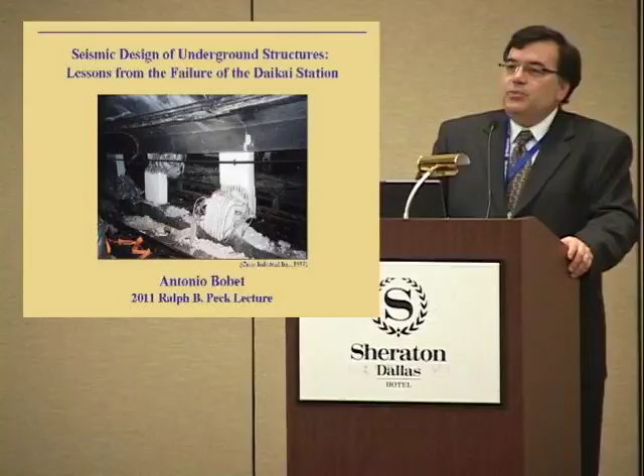The focus of this presentation is what we learned after the failure of the Daikai station. The Daikai station is relevant because this is really the first underground structure that collapsed during an earthquake and is well instrumented, and there was no liquefaction.

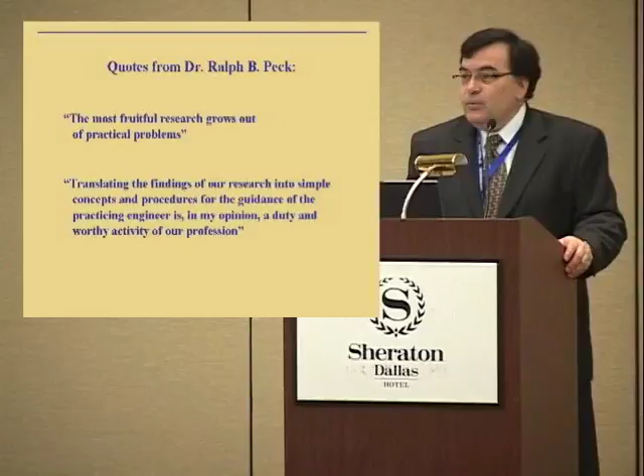But before starting, I would like to share with you a couple of quotes from Dr. Peck that I find relevant for this presentation. The first one says, 'The most fruitful research grows out of practical problems.' The second one is, 'Translating the findings of our research into simple concepts and procedures for the guidance of the practicing engineer is, in my opinion, a duty and worthy activity of our profession.' I hope these two quotes that inspired some of us to move forward with this research will be found relevant to this presentation.

The work could not have been done without the help of many people, and I want to acknowledge them right now. One is Dr. Huo, who is now at Earth Mechanics, a geotechnical engineer and very good colleague, Gabe Fernandez at the University of Illinois, and colleagues in structures, because we were looking at the failure of an underground structure. To work on that we need the expertise of different disciplines, and we worked together, geotech and structures, and I hope you'll agree that was a fruitful collaboration. I want to acknowledge the work of our colleagues in structures, Dr. Ramirez at Purdue, Dr. Sozen, also at Purdue, Dr. Parra Montesinos at the University of Michigan, and Dr. Maekawa at the University of Tokyo, and also the support of NSF and Purdue University.

This is the outline of the presentation. I'm going to start with the motivation of the work, a little bit of background, then spend a few minutes on our current design and highlight the problems I see in what we are doing right now. Then I'll get into the details of the work we did, the results we got, some conclusions, the lessons we think we learned, and then propose an approach for the design of underground structures, finishing with some conclusions.

What you see here is two pictures that hopefully bring across the setup of what is happening. This is the epicenter of the Kobe earthquake in 1995. Here are the epicenters of earthquakes that occurred between 1961 and 1994 with different intensities. This was an earthquake with an intensity of 6.9. The epicenter was about 13 kilometers deep, about 15 kilometers from the city of Kobe.

The source of these earthquakes - the Friday earthquake with an 8.9 magnitude, that was where pretty much the epicenter happened. This is a very large earthquake, a great loss to Japan, and I hope that today we should all have our thoughts with the Japanese, with our colleagues over there at this time of great trial.

The source for the earthquake, on the right-hand side picture, is the movement of the Pacific Sea Plate and the Philippine Sea Plate and the Pacific Plate that are moving against the Eurasian Plate and the North American Plate. You have these troughs and contacts, and this is a source of these large earthquakes.

The picture on the left-hand side, that's this yellow star.

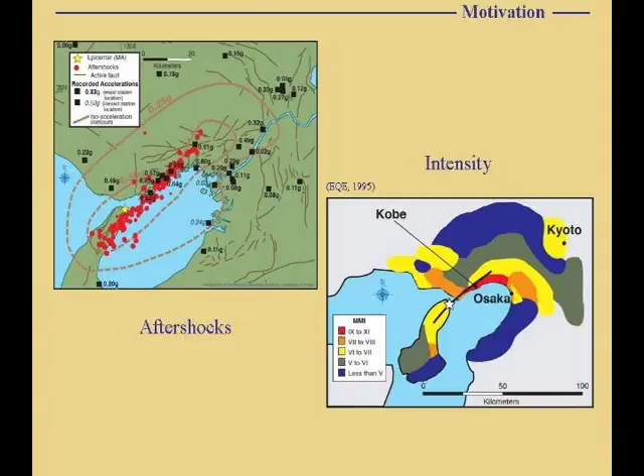The picture on the right-hand side is a contour of the intensity of the earthquake, and this red zone is of intensity between 9 and 11. As you move away from the epicenter, you expect the intensity would decrease, and indeed it does so. Away from the epicenter, you see these blue contours with intensities - this is the modified Mercalli intensity, less than 5.

As you move away, you expect a decrease of intensity, but also the soil conditions change. Close to the Osaka Bay, you have soft soils, and that provides a significant amplification of the earthquake. As you move away, there are two issues that play a role: one is the distance, and also the ground conditions change - you get into rock, and then the ground motions are a little bit lower.

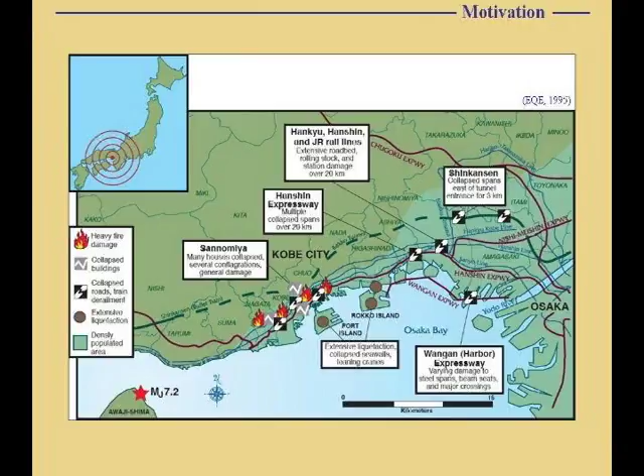Then you move towards the city of Kobe, which is about 15 kilometers from the epicenter. There was significant destruction - about 5,500 people died because of the earthquake, about 180,000 buildings collapsed, and significant fires after the earthquake caused a lot of damage because of the loss of lifelines. The Daikai station was very close to this node that says Sannomiya.

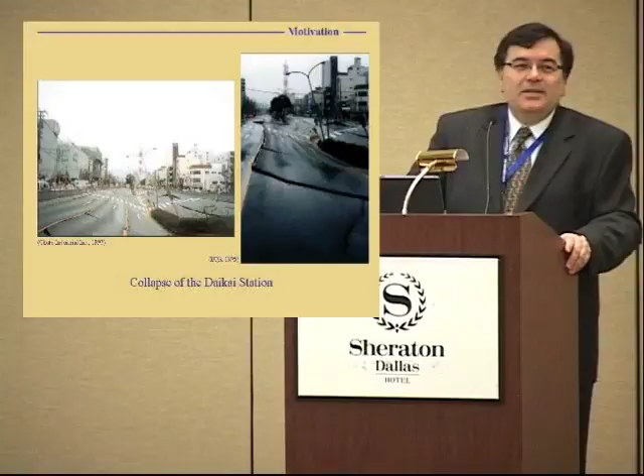That's where the focus of this talk is going to be. These are two photographs of road 28, on top of the Daikai station, showing the subsidence on top, caused by the collapse of the station - about 200 meters long by 20 meters wide, with about 2.5 meters of settlement of the road.

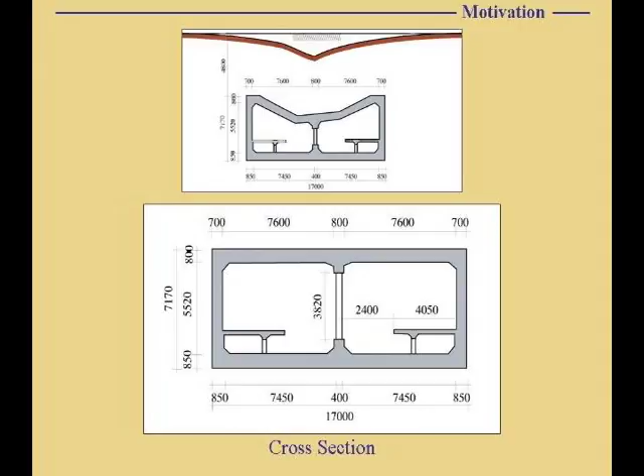It's about 4.8 meters below the surface. It was built between 1962 and 1964 by the cut and cover method, reinforced concrete, fairly thick walls about 85 centimeters thick, and the station is supported by central columns - we'll talk about those later - about 0.4 by 1 meter in dimensions, spaced about 3.5 meters apart.

The failure of the Daikai station was because the central columns collapsed in shear - a type of brittle failure. The collapse of the central columns induced the collapse of the top slab of the station, and that created the subsidence of the road on top of the station.

Now, the failure of the Daikai station, at the point when we started our work, was well known. The station failed because it was not designed for seismic loading, and the collapse was by shear failure of the central columns, which produced the collapse of the top slab.

The work that we did, and the point I'll try to make through this presentation, is that we were not necessarily interested in the collapse mechanism per se. What we wanted to find out and investigate is the load transfer mechanisms between the surrounding soil and the structure.

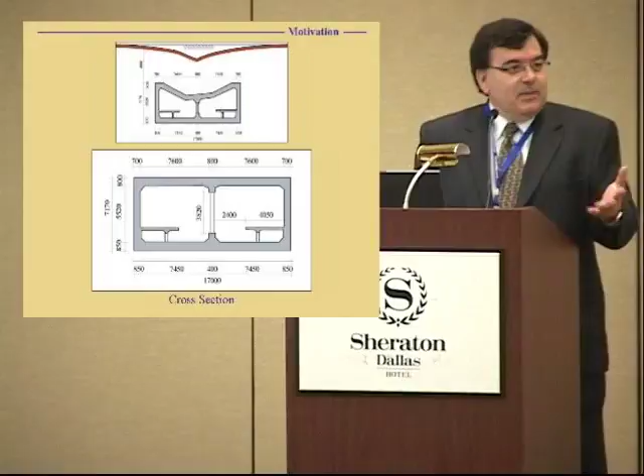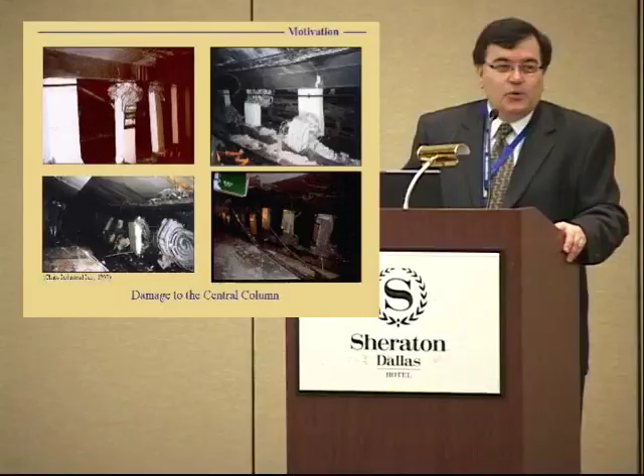If you focus on the top right picture, you see the column that failed, and you can see all the longitudinal reinforcement of these columns, and how this reinforcement buckled while the core concrete of the column is crushed. This is a typical mechanism of failure in shear, where there is not enough transverse reinforcement to absorb the shear forces induced by the earthquake.

So the structural mechanism of failure was clear. Work done by others, by Maekawa and others, showed nicely that the mechanism of failure was shear. But the point we were trying to look at is how the soil and structure work together, and how the displacements of the soil are transferred to the structure, and how the structure reacts.

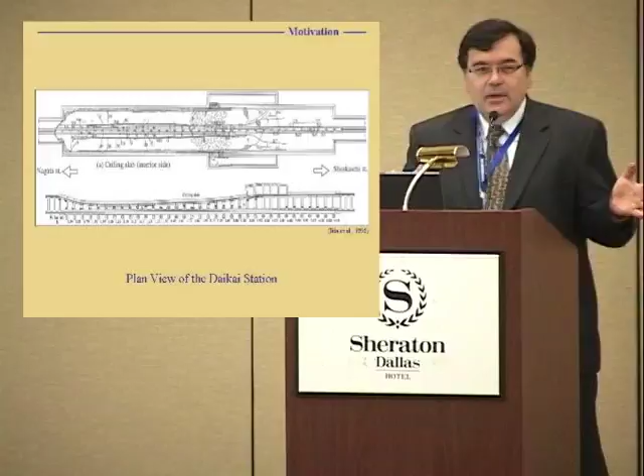This is a plan view of the failure of the station. The top is, as I mentioned, a plan view of about 30 columns that collapsed, about 100 meters long. The bottom is a vertical cross-section of the station with the columns collapsed. We'll talk later about the 3 areas of the station we want to look at: one is the areas that collapsed, and the others that did not. The question would be why this cross-section or structure collapsed and the others didn't.

This is a plan view, a sketch of the Kobe underground rapid transit system. This red circle shows where the Daikai station is located. Kobe has 2 underground transport systems, one public and one private. The Daikai station belongs to the private transport system, but other names that appear here, Sannomiya, Kamisawa, Nagata, Shin Nagata, are stations that also suffered damage.

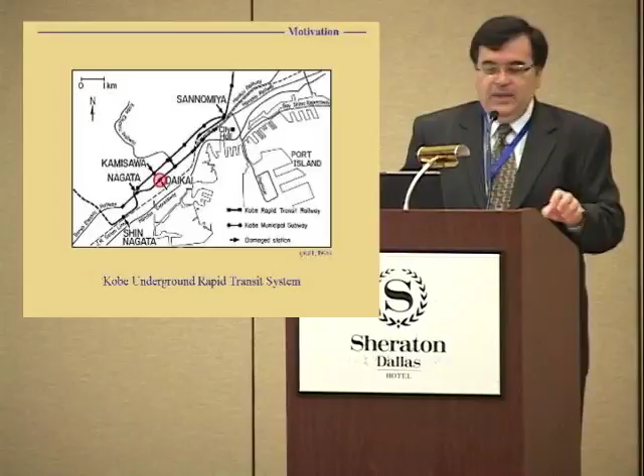As I move through the presentation, one point I'll try to make, and I'll insist about this later on, is that underground structures are sensitive to seismic loading, and that issue has been somewhat disregarded by us and by our colleagues in structures.

This is a sketch of the underground rapid transit system in Kobe. The Daikai station is in red, where the collapse occurred. On the left-hand side is the Kosoku Nagata station, where there was damage too, 5 columns, and the end of the station was damaged. The tunnel connecting Kosoku Nagata with Daikai station had 210 columns damaged.

As I mentioned, the Daikai station collapsed. If you move right to the Shinkaichi underground station, next to it there was an underground shopping mall with also damage to the structures.

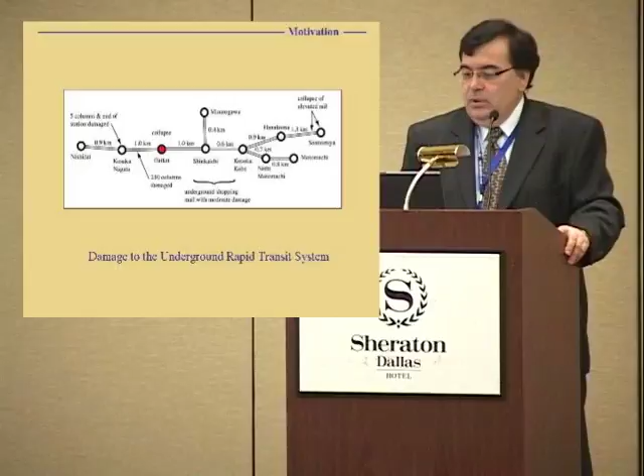So moving into current design, there are 3 sources of damage to underground structures: fault displacement, ground failure, and ground shaking. Fault displacement causes damage because the underground structure crosses an active fault. There is displacement of the active fault, and this displacement either has to be accommodated by the surrounding ground and support, or there is going to be damage to whatever is inside the underground structure.

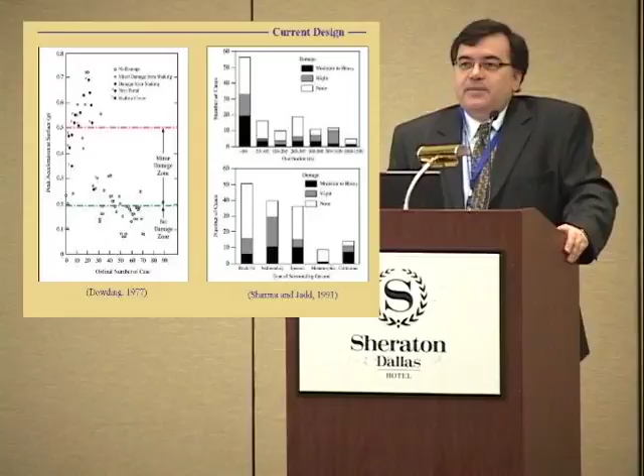Now, in the following slides, let's see if I can make the point that underground structures are indeed sensitive to seismic loading. What I'm showing here is 2 plots. One on the left is from Dowding in 1977, who compiled about 71 case histories of tunnels that suffered damage during an earthquake. On the horizontal axis, you have the case number.

On the vertical axis is the peak acceleration. This is the acceleration measured on the surface on top of the center of the tunnel. Of the 71 tunnels, about 20% had damage classified as significant damage.

These are the dots that are black. There were two other types of damage: one is minor or light damage, shown as gray dots, and no damage, shown as white dots.

The recommendation or conclusion is that if the peak ground acceleration on top of the tunnel is less than 0.2 Gs, the tunnel is not going to have damage. If the acceleration is larger than about 0.5 Gs, damage to the underground structures can be significant, and moderate to light damage occurs if the peak ground acceleration is between 0.2 and 0.5 Gs.

Sharma and Judd, in 1991, looked at about 190 tunnels and the level of damage. They classified the damage again into moderate to high, shown as the black columns, slight damage shown in gray, and none shown as white.

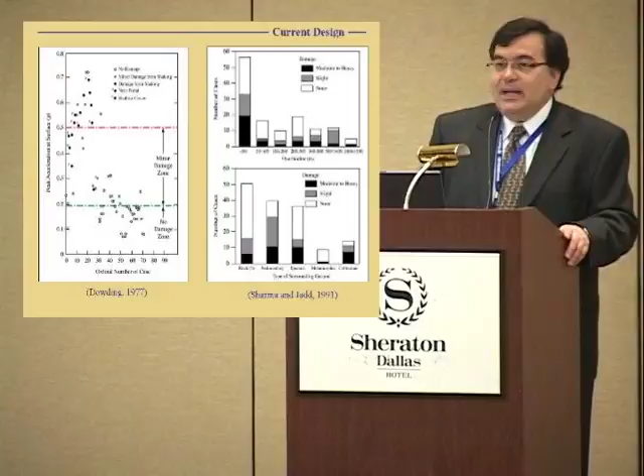So if you think in terms of stiffness, which we'll discuss more later, tunnels excavated in softer ground initially seem more sensitive to damage than tunnels excavated in stiffer materials.

One of the tunnels crossed an active fault. There was damage at the portals, mostly in terms of landslides and slope failure, and damage to the tunnel itself by shaking.

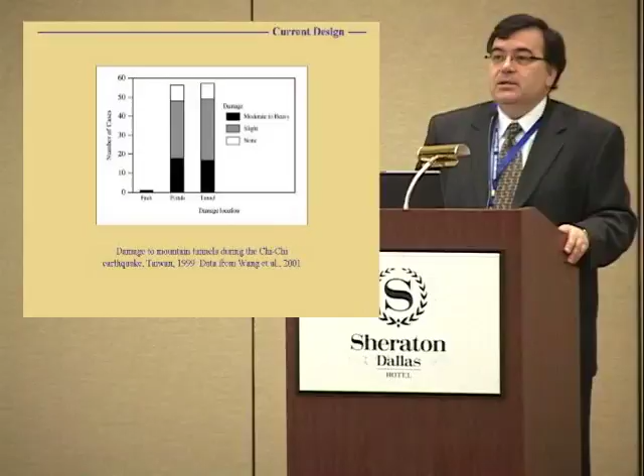Wang looked at 57 cases, and of these, 49 showed damage to the tunnels. This is significant evidence of damage to underground structures, which are sensitive to earthquakes. We have to look at their response during an earthquake, and they have to be designed to resist the deformations imposed by the earthquake.

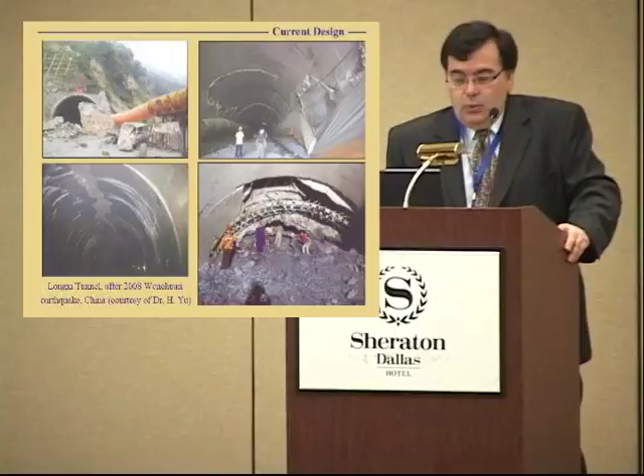This is damage that occurred at the Longxi tunnel after the Wenchuan earthquake in 2008. The top left picture shows failure at the portals, typically in the form of slope failure and landslides. The other pictures show damage inside the tunnel, failure of the liner in compression, shear, or bending, which can lead to collapse of the tunnel itself, as shown in the bottom right picture.

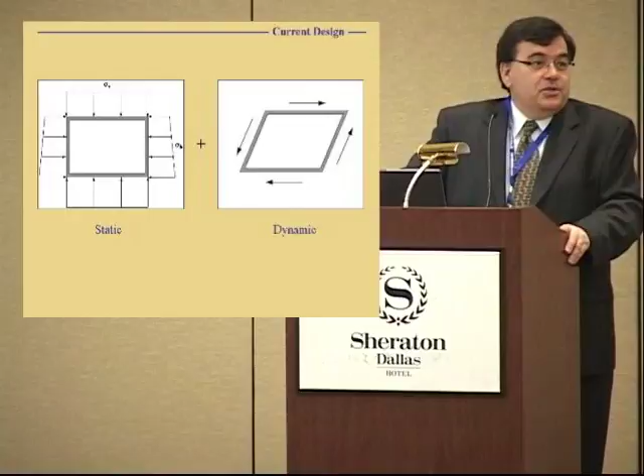Now, when we design for underground structures, there are two scenarios that need to be considered. One is, of course, the static loading, and the other one is the deformations imposed by the earthquake. This is what I call here the static and the dynamic loading.

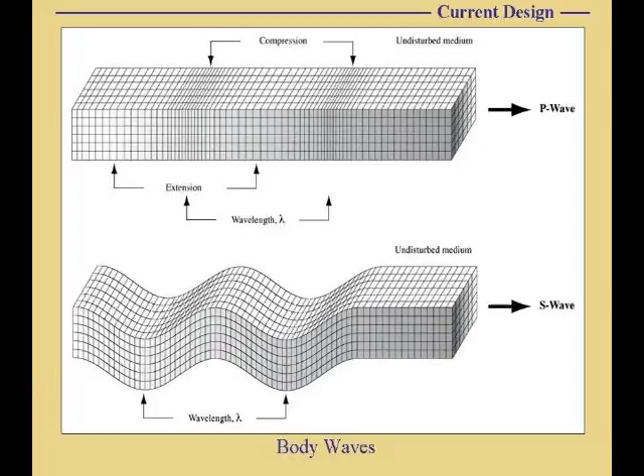Now, these waves are going to impinge the tunnel at a general direction, but what we can do is decompose these waves into P waves that are parallel to the axis of the tunnel, and P waves that are perpendicular to the axis of the tunnel, and shear waves that propagate parallel to the axis of the tunnel, and shear waves that propagate perpendicular to the axis of the tunnel. Each of these waves is going to induce different deformations on the tunnel itself.

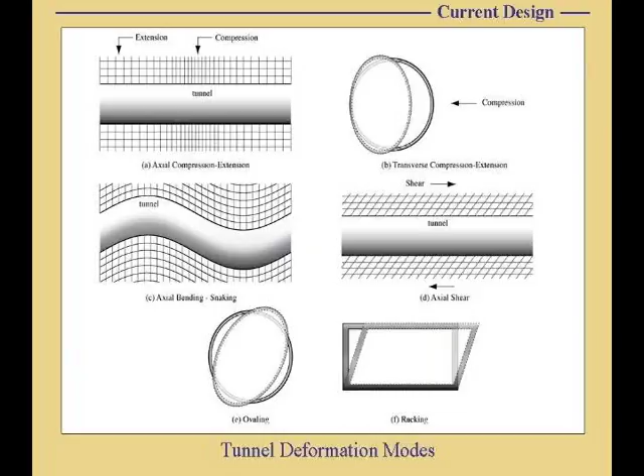Shear waves that are propagating parallel to the axis of the tunnel, that would be the center left, and propagating, let's say, on a vertical plane, would produce bending deformations of the tunnel. That's what we call snaking deformations of the tunnel. Shear waves that are propagating perpendicular to the axis of the tunnel, but the direction of motion is along the axis of the tunnel, that's depicted on the center picture on the right-hand side, and what you have is shear deformations on top and bottom of the tunnel.

The worst conditions by far are produced by shear waves that are propagating perpendicular to the axis of the tunnel, with motions also perpendicular to the axis of the tunnel. This is shown at the bottom of the figure. If you have a circular cross-section, that induces ovaling deformations of the tunnel, and if it's a rectangular cross-section, it produces what we call racking deformations of the tunnel.

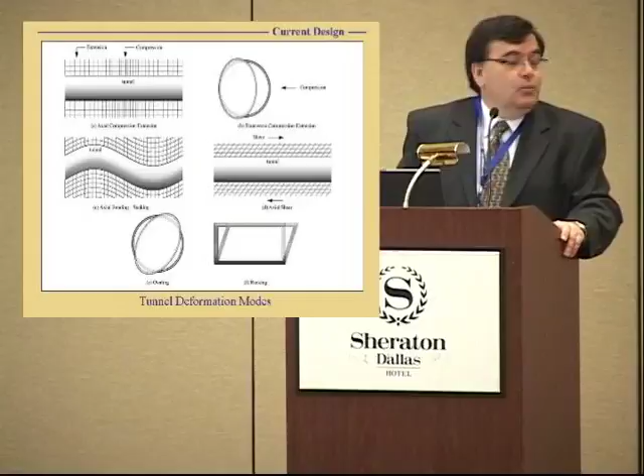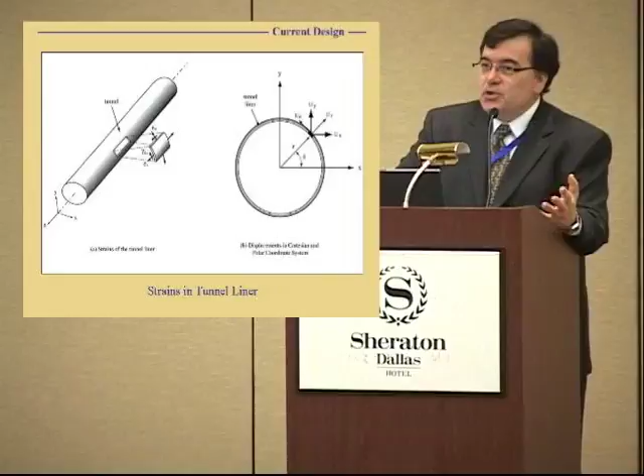Now, how are these deformations—the deformations induced by shear waves traveling perpendicular to the axis of the tunnel, with motions perpendicular to the axis of the tunnel—estimated? Most of the time, what is used is the free field method. The free field method assumes that the structure deforms the same as the free field. We compute the deformations of the free field, then we look at the location of the structure compared to these deformations, and look at the difference in deformations between the top and bottom of the structure. That's the distortion of the structure, and that's what we design the structure for. This is what is called the free field method—we design the structure as if the structure is not there.

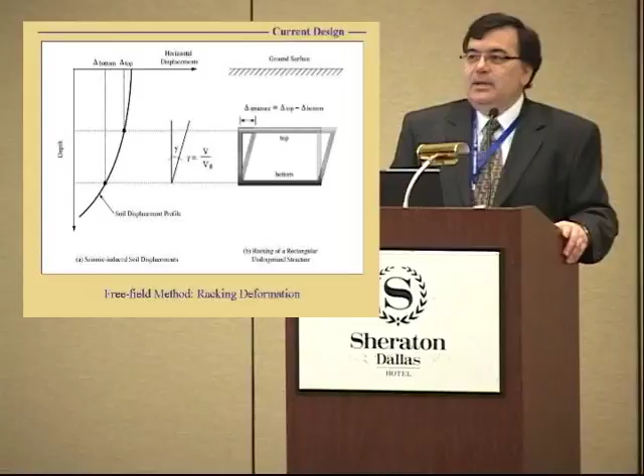Now, this equation is based on elasticity. And of course, the deformations of the soil are going to be much larger than those induced by elasticity. But if we try to estimate the deformations induced in the soil, they can be very large, and then we are in trouble trying to design a structure that is going to resist so much deformation. So it seems that the numbers that come up from this equation make sense, so we use it most of the time. Okay, so that's what we do. But now let's think about what we do.

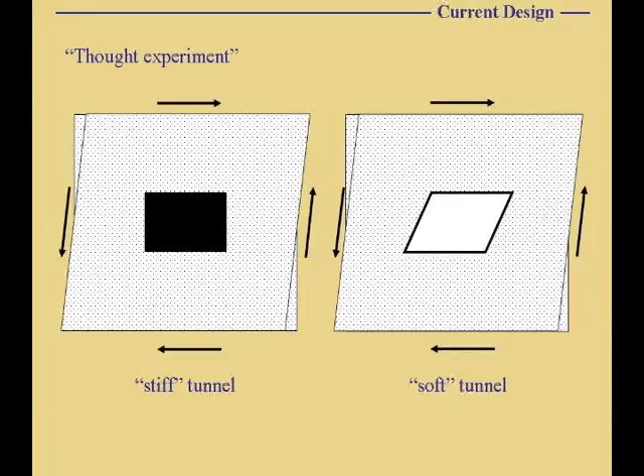Now I want to share with you a thought experiment. The beauty of thought experiments is that we can do whatever we want, and come up with any scenario that is physically impossible, and yet we can think about that. So let's think about a very stiff tunnel. We put this stiff rectangular structure in an infinite medium, and impose far-field deformations in the form of far-field shear stresses or far-field shear strains. Now, what we expect is that far from the structure, we recover free-field deformations. That's the principle of Saint-Venant, right? If we look far away from whatever point of application or disturbance we have, what we recover should be independent of what is happening at this particular location.

But what happens close to the structure? The structure is stiff, it's not going to deform. Of course, it's going to take some load because it's not going to deform. But also, the soil around the structure is not going to deform. So the structure is going to deform less than the free field. So if we use the free field method to design the structure, we may be extremely conservative.

Now let's go to the other extreme, and that's why it's a thought experiment. Let's suppose we introduce into this medium what we call a soft tunnel. Let's think of a hole - it's a thought experiment because we don't have to think about the support of this hole. Let's do the same thing: we apply a far field deformation. Far from this hole, we're going to recover free field deformations. But now, because we have a hole, we have weakened this medium. Now the deformations around this structure are going to be larger than the free field. So the design using the free field method in this case is non-conservative. So if we use the free field method for stiff structures, we are conservative, but we don't know by how much. If our structure is softer than the surrounding ground, then we are unconservative.

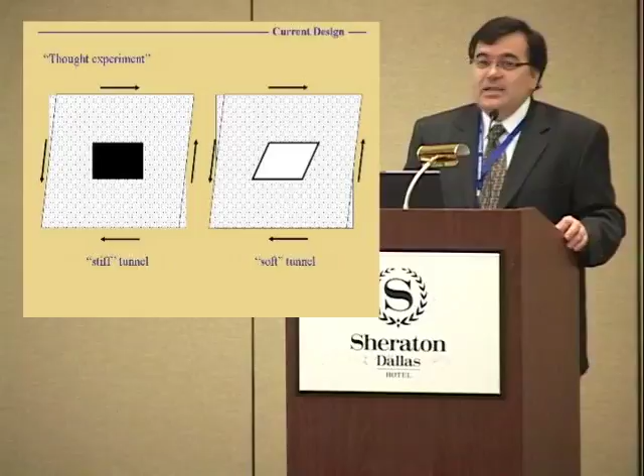So there are two things you can take from this lecture: one is that we need to design underground structures for seismic design because they get damaged and they fail. And the second thing is that I think the free field method should be abandoned because it provides very poor information about the actual response of the structure.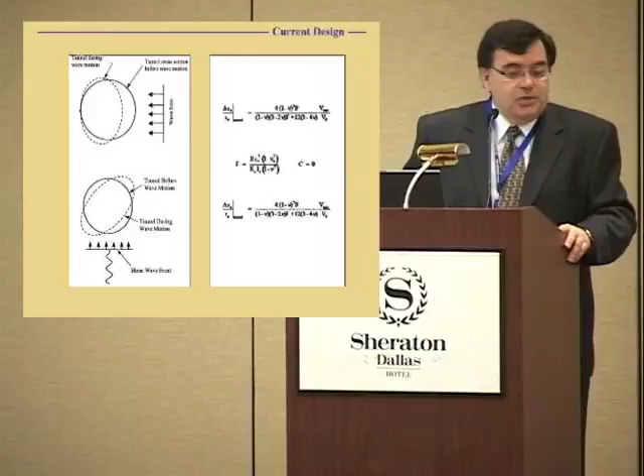So if we take this factor and make it 0, you have a stiff structure, and indeed you have 0 deformations. But if you make this factor infinite - this is a thought experiment, so we can do that - then you have a very flexible structure, and these ratios of deformation are going to be much larger than the ratio of peak particle velocity divided by P, or shear wave velocity. I hope that this slide closes this argument.

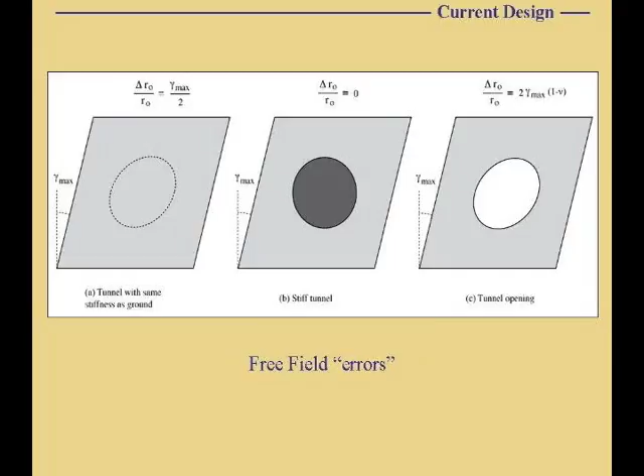On the right hand side, what you have is the deformations of a hole in an elastic medium. But if you look at the elastic solution at the top, that delta R over R is a measure of the distortion of the structure. That can be about 3 to 4 times larger than the distortion induced in the structure if the flexibility is the same as the surrounding ground.

So again, still we use the free field method. The free field method actually was used for the redesign of the Daikai station. But the point I'm trying to make here is that that should be abandoned.

Now, let me get a little bit into the details of the work that we did and what we learned. Of course, part of what I told you already is what we learned, so it's not a continuous process. But let me share with you some of the results that we get. So I'm going to get into the numerical analysis.

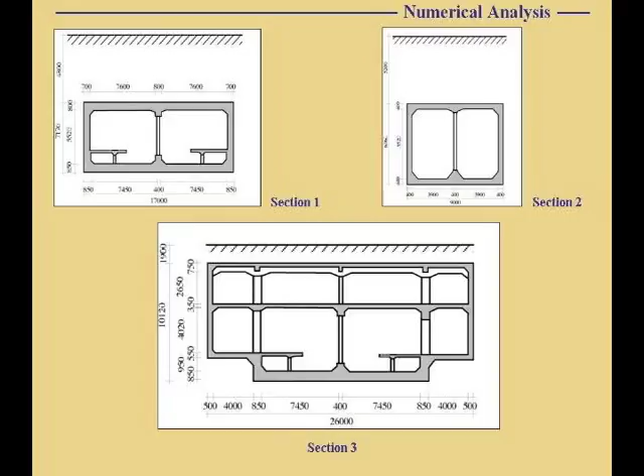All these are different structures. All of them show different behavior. If we had used the free field method, all of them should have deformed the same, and yet the behavior is different. And the question, of course, is why.

So these are the 3 sections. Section 1 is the one that collapsed. It's about 17 meters wide, 7 meters tall, about 4.8 meters below the surface. Section 2 is the tunnel, about 9 meters wide, 6 meters tall, same overburden.

Section 1 has columns with a cross-section of 0.4 by 1 meter, spaced at 3.5 meters. Section 2's columns are a little bit smaller, 0.4 by 0.6 meters, spaced 2.5 meters. And section 3 is very large - this is the access station. It has about 26 meters wide and about 10 meters tall and reaches the surface.

These are pictures of the station as it is today. And what you see is the central columns, painted white and red. Everything is new except the bottom slab. The bottom slab is the original slab. The rest is rebuilt. So they excavated the station, rebuilt the station, and refilled the material around the station.

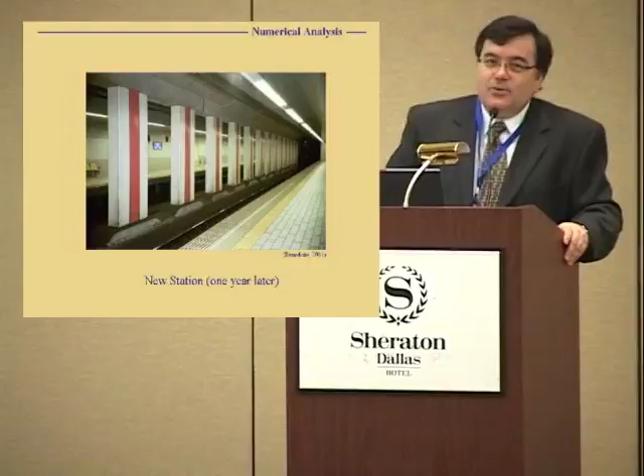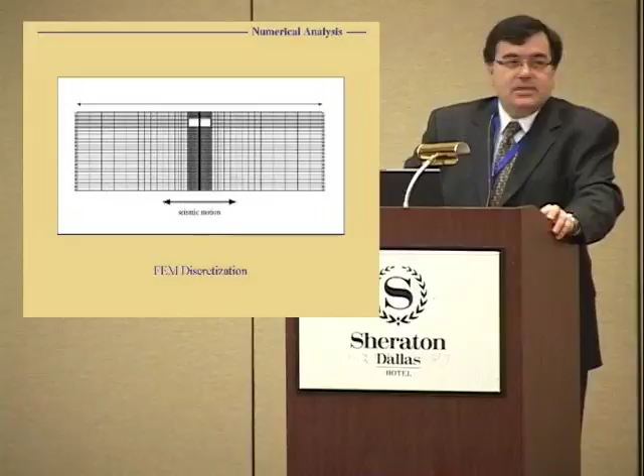So what we did is numerical analysis. We discretized the medium, put the station in each of the sections: section 1, section 2, section 3. We input the seismic motions at the bottom of the discretization, and used the actual soil properties at the site to do the simulations. Again, the point is to understand how the structure and the soil work together, not necessarily to reproduce the failure of the station.

This picture shows the two soil investigations that were done for the station. The one on the left was done in 1959 for the design of the underground station. The one on the right was done after the failure of the station in 1995. This is an expanded view of the stratigraphy reported from this investigation.

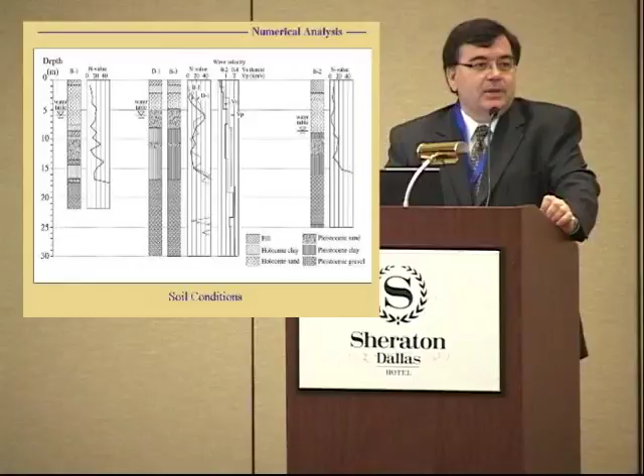There are, in essence, three types of soil. There is a fill on top, about 1 to 2 meters thick. Then there are soft deposits of Holocene origin, mostly fine sands and clays, with low SPT blow counts, maybe between 8 and up to 10 or a little more. As you go deeper, the origin of the deposits changes—they are of Pleistocene origin, also sands and clays, but much stiffer, with blow counts below a depth of about 20-something meters that go beyond 40 and 50.

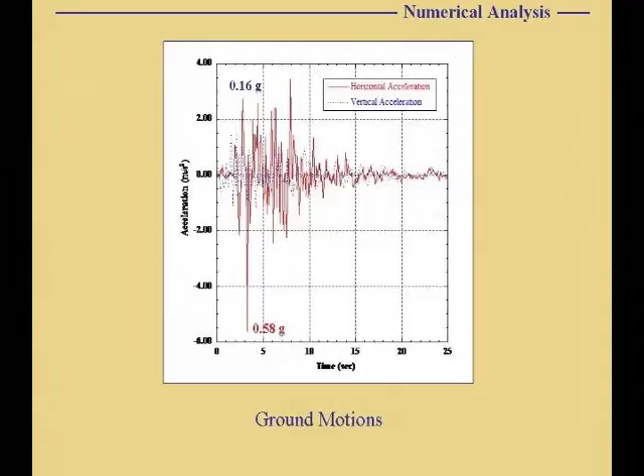One point I want to make right away is that in this particular case, the vertical acceleration's influence on distortion of the structure was very small. What the vertical acceleration did was increase the axial loads on the structural elements by about 16%, roughly 0.16 G.

We understood that one of the key factors we needed to take into consideration to simulate the behavior of the structure was the relative stiffness between the structure and the surrounding ground. So we decided to use a soil model that was, on the one hand, simple enough so we could do all these simulations in a few days, and also robust enough that we could get a solution.

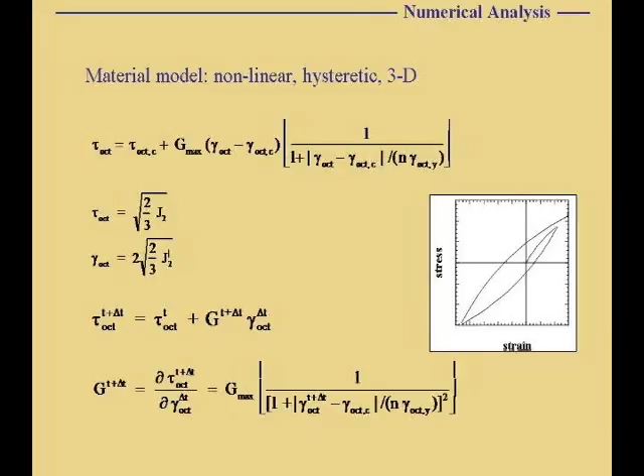But it also should represent the behavior of the soil—a model that reflects the loss of stiffness of the soil with deformation, and also reflects the increase in damping of the soil with deformation. We checked this model by comparing its predictions with laboratory results.

We would change the stiffness of the central wall such that the response, the behavior of the structure in 2D, was equal to the response of the structure in 3D.

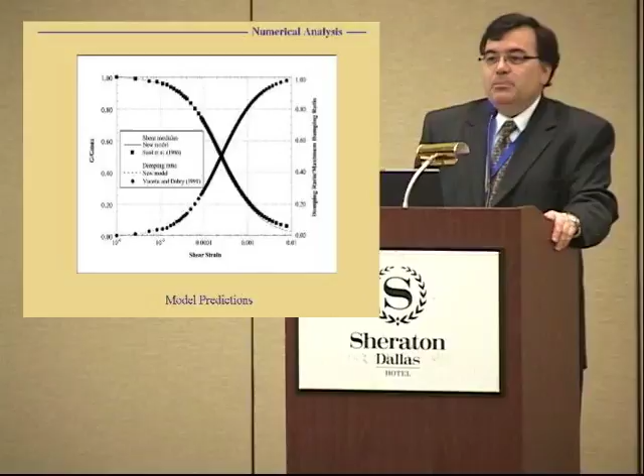We'll go through the details and see if that was indeed enough for the collapse of the structure. Anything after 4 centimeters is basically theoretical because the structure was not there anymore. But we felt we should go further and get the complete solution, because we might learn something from it. And we did.

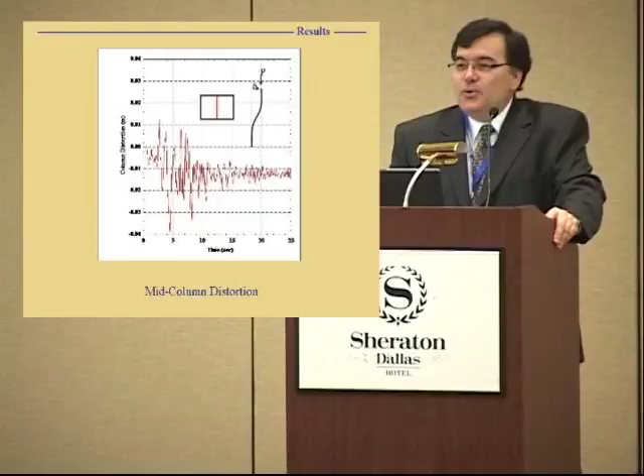If you look at this plot, of course there's significant damping because of the soil model we're using, but one interesting thing is that at the end of the earthquake, about 20-25 seconds, there are permanent displacements. The displacements don't go back to zero. This is because the loading and unloading portions of our soil model are not the same, and because of that you expect to have some permanent distortions on the structure.

Numerical methods have the advantage that you can get all solutions possible anywhere you want. The key, as mentioned earlier, is how to interpret these results, and I hope we try to do some interpretation and share it with you.

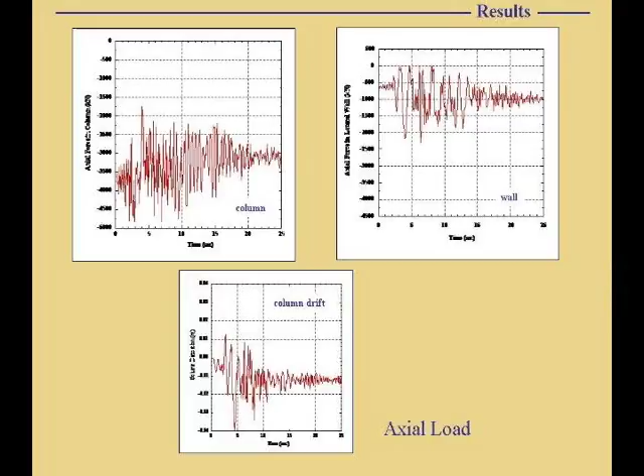If you look at the plot on the left, you start from static conditions, then you have the oscillations produced by the earthquake. But the end result is that there is some unloading on the central column. Of course, if some part unloads, there is no free lunch - somebody else has to take this load. If you look at the plot on the right, indeed the lateral walls are the ones that take the load. That's not uncommon in underground structures, because the center of the structure is a little more flexible than the edges. So the center tries to unload, there is some arching effect, and it transfers a little bit of load from the center part of the structure to the stiffer lateral walls.

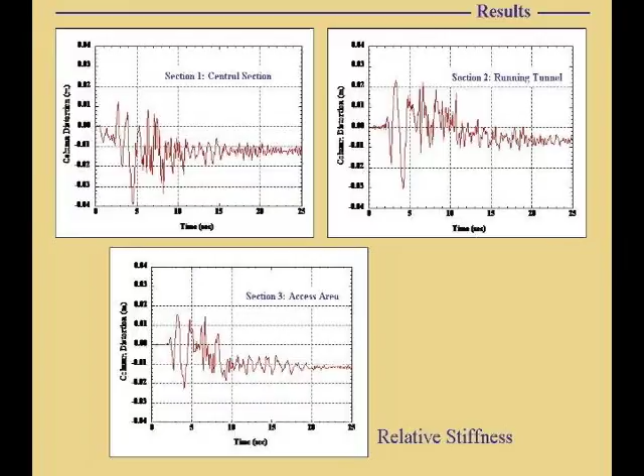Looking at these two, the deformations of section 1 are larger than those of section 2. The deformations of section 1 are about 4 centimeters, that's what the model predicts, while the deformations of section 2 are 3 centimeters. The soil around the structure is the same, so the reason for that is that section 1 is a little bit more flexible than section 2.

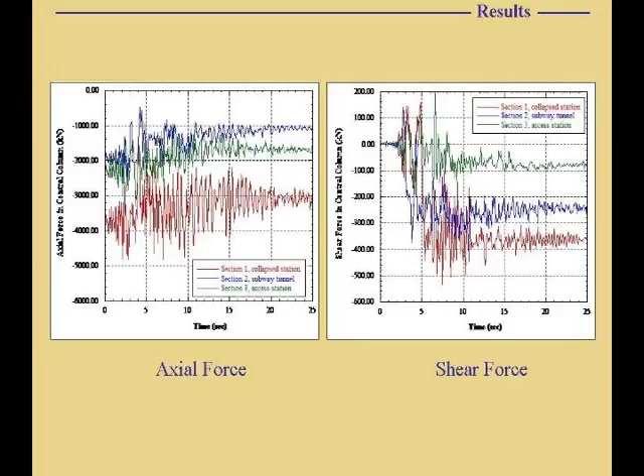And because of that, it's going to deform more than section 2. If you look at the distribution of axial forces and shear forces, which we need for the structural analysis, in red you have section 1, and in blue you have section 2, the tunnel. Section 1 has larger axial forces because the span of the station is larger, and also has larger shear forces because the span is larger and deforms more than section 2.

I'm going to get a little bit into the details of structural analysis, and I think this is important because as geotechs, we need to understand what our colleagues in the structures do, and perhaps more importantly, we need to convince our colleagues in the structures that they need to understand what we in geotech do.

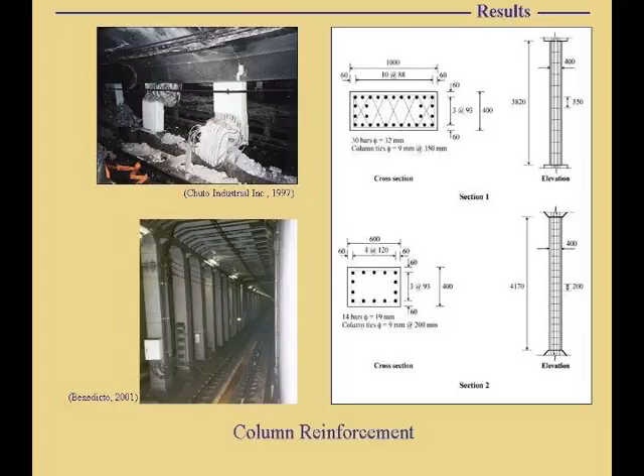The top is section 1. It was heavily reinforced in the axial direction, with about 6% of the area being steel. The transverse reinforcement was done by hoops and zigzag stirrups connecting these columns. But if you look at the spacing on the far right of this picture, it was 350 millimeters. Our current code requires spacing of transverse reinforcement of about 100 millimeters. So clearly the spacing was too large.

These stirrups and this transverse reinforcement could not prevent the buckling of the longitudinal reinforcement. If you look at the actual picture, you see this longitudinal reinforcement buckling. It's because there is a lack of transverse reinforcement.

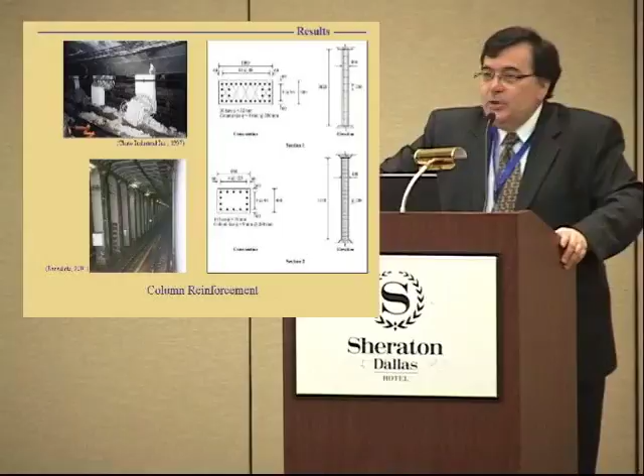The bottom right-hand side shows the steel reinforcement on the central column of the tunnel, and you have longitudinal reinforcement of about 1.6%, much lighter axial reinforcement, and transverse reinforcement with a closer spacing, about 200 millimeters.

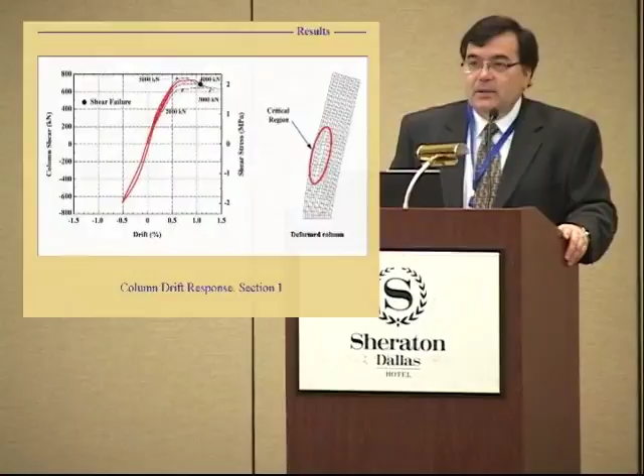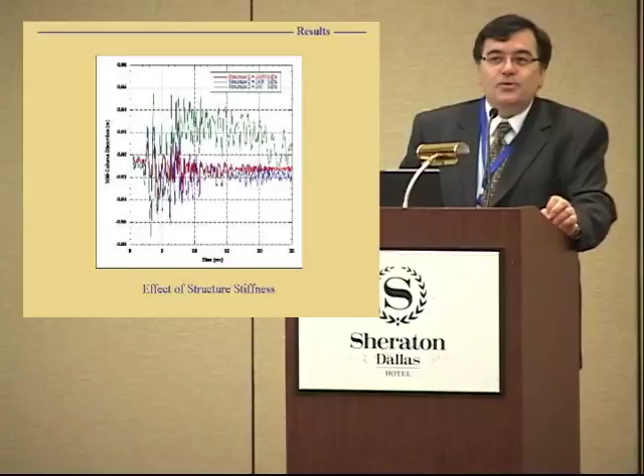When there is damage, we see drops in the stiffness of the structure by a factor of 2 or 3 easily. Now, we wanted to look at how the structure responds to the soil, and how the soil, most importantly, responds to the presence of the structure.

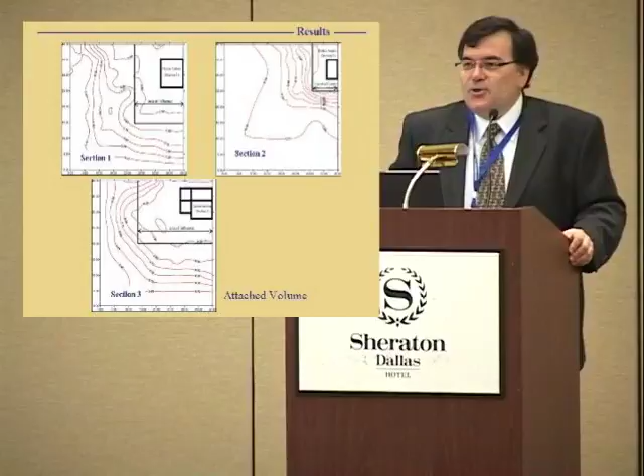The size of this volume of soil attached to the structure depends on the dimension of the structure, but also depends on the stiffness of the structure. It depends on another factor, which is the interface between the structure and the surrounding soil, and we'll talk about this in a minute. So if you look at the interface, we go back to this plot.

We can think about relative stiffness. Relative stiffness is the most important factor that controls deformation. But if we think in terms of relative stiffness, the soil has a potential to impose deformation on the structure. The soil deforms. By the way, for underground structures, this is a deformation-based problem rather than a stress-based problem.

So we have this potential of the soil to impose a deformation on the structure, and this potential is going to be modified by the relative stiffness between the structure and the surrounding ground. In this particular case, the structure is stiffer than the surrounding soil, but I also showed you a case where the structure was softer than the surrounding soil.

Now this potential has to be imposed on the structure through the interface, and through the interface we're able to transfer normal stresses and shear stresses. So what's the expectation? If we have a very stiff interface - let's suppose a tight interface - that means the soil can transfer as much shear to the structure as needed. The expectation would be that the stiffer or stronger the contact, the larger the deformation of the structure.

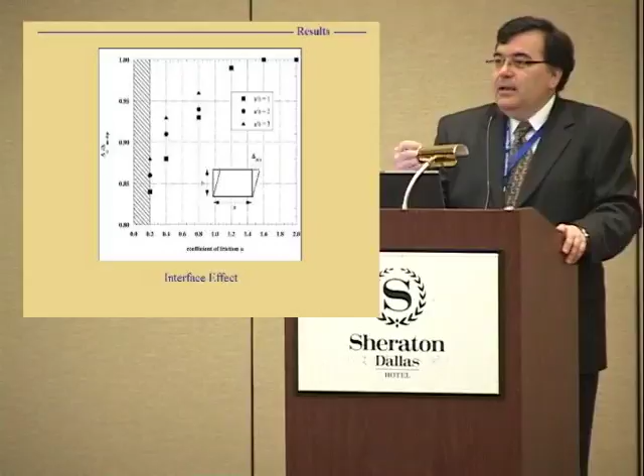But looking at this plot, we see that as the coefficient of friction increases, the deformations of the structure increase, and then they end up - for a coefficient of friction of about 1.4 or so in this particular case - we recover a tight interface.

So yes, that plot shows that as you have a stronger interface, the deformations of the structure are larger.

We do these calculations again with the soil model, nonlinear soil model, the structure, and so on and so forth. Now I'm showing you 3 plots. The plot on the top left is with a frictional interface of 0.4. By the way, all the calculations I showed you before were done with this frictional interface. It's an interface where, as there is relative slip between the soil and the structure, you have friction controlled by this coefficient of friction, and the soil can detach from the structure.

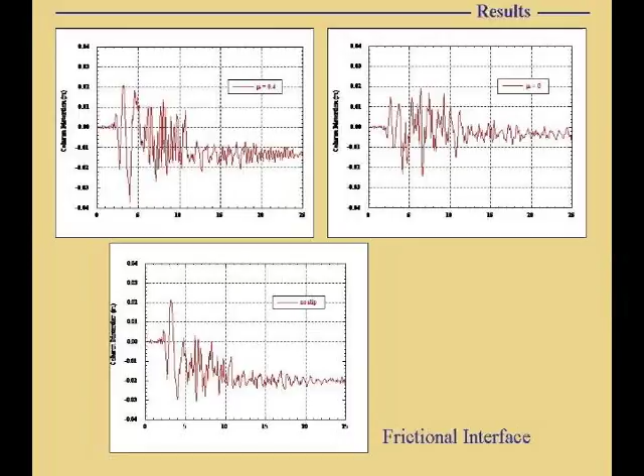All these plots are for the section of the station that collapsed. On the top right is the structure distortion, the column distortion, when the coefficient of friction is 0. On the bottom are the distortions of the station when the interface is tight. Now, if we look at the distortion that is produced, the larger distortions come from a coefficient of friction of 0.4, then from a tight interface, and the smallest ones are when there is no interface. And yet, the concept we have is that a tight interface should produce more displacement.

So what's happening here? Let's go back to our contour plots to see how the soil reacts in the presence of the structure with the 3 interfaces. The contour plots on the top left are the ones I showed you before with a frictional interface. On the top right is with a frictionless interface, where there is no shear that can be transmitted from the soil to the structure. And the bottom is with a tight interface.

Now we look at this volume of soil attached to the structure, and you see that this size is related to the interface. Why so? Look at the bottom, the tight interface — the volume of soil attached to the structure is very large, because the structure constrains the soil significantly, since the shear at the interface is significant. The plot on the top right shows this volume of attached soil is very small, because the constraints of the structure on the soil are much smaller. The soil around the structure can deform more because there is no shear at the interface.

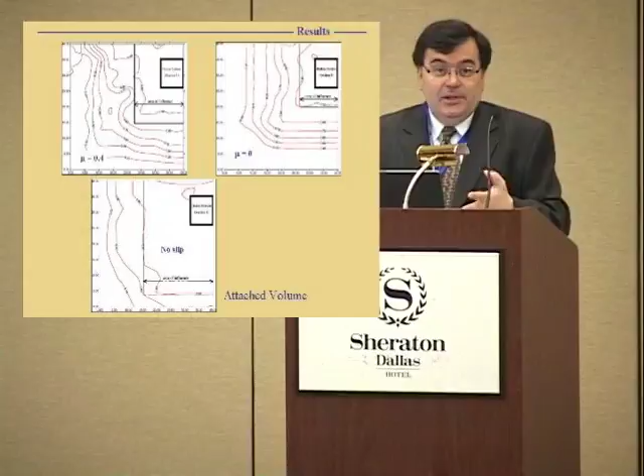So there are 2 factors here that play together but go in opposite directions. One is the relative stiffness — that's the potential for the soil to induce deformation on the structure. The other is the capability of the soil to induce this deformation on the structure, and that depends on the interface. So while a strong interface produces strong capability of inducing deformation of the structure, the potential is smaller because it constrains the soil more. A weak interface has low capability of inducing deformations because there is no shear — deformations can only be transmitted through normal stresses. Yet the deformations on the soil are going to be larger because it's less constrained, so the potential to induce deformations is larger. Of the two factors, the one that controls by far the deformation of the structure is the relative stiffness.

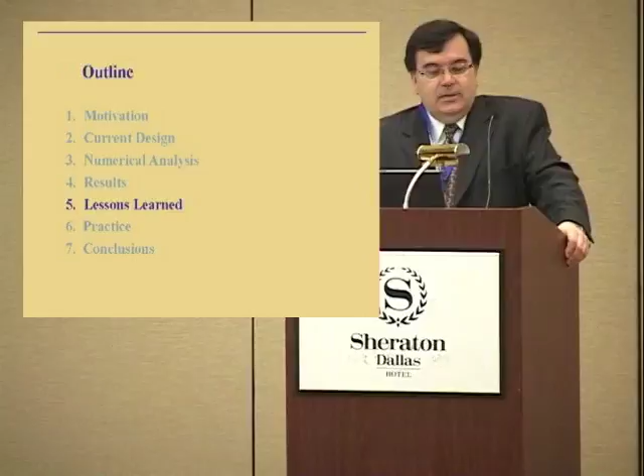So what are the lessons learned, at least some of them? One is that the design of the Daikai station was not adequate because it was not designed for seismic deformations. The deformations depend strongly on relative stiffness, and interface friction has an effect on the deformation of the structure — we just talked about how a stiff structure deforms compared to the soil or a soft structure, and what the effects of the interface are.

But let me go back again to the 2 points I want to remind all of us of. One is that underground structures are sensitive to earthquake loading and must be designed, they need to be designed to resist earthquake loading. Second is that the free field method should be abandoned, and we should incorporate into our design the effects of the presence of the structure.

All these calculations were done in a university environment where we have access to good computational resources. We were able to write our own model. These simulations on a large computer took a few days. All this is great and possible. The question is, what about practitioners? Maybe not everybody has access to the resources that we have, so what do we do with what we've learned, and what recommendations can we make to practitioners?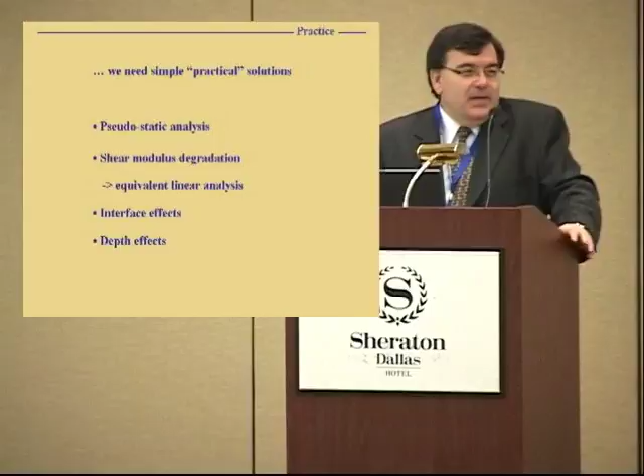Then what happens with interface effects, because it's easier to think in terms of a tight contact rather than a frictional contact, and also what happens with depth, as different structures may be close to the surface or go deeper. There is quite a bit of work out there, and here I'm showing some recommendations from Hendron and Gabe Fernandez, that shows that if the wavelength of the ground motions is about 8 times or larger than the effective significant cross-section of the structure, then a pseudostatic or static analysis is okay.

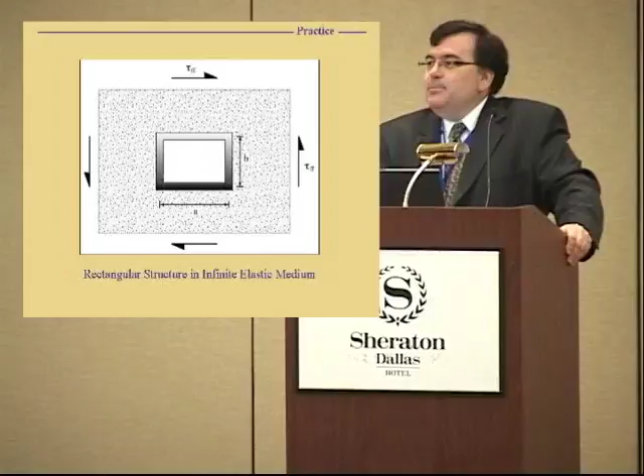So what I'm going to do is follow the discussion for putting forward a simple and accurate method for practice. I'm going to focus on a deep structure — a deep rectangular structure subjected to far field shear stresses or strains induced by the earthquake in the free field. It has dimensions A for width, B for height.

I'm showing here a plot of relative deformations on the vertical axis. What you see is the structure deformations normalized by the free field deformation. So we know the free field deformations of the soil medium, we go to this plot, and we can get the deformations of the structure. On the horizontal axis is a factor F, which is a measure of the relative flexibility between the structure and the surrounding ground — essentially the stiffness of the structure compared to the stiffness of the surrounding ground.

There are two sets of data here. One is generated by Wang in 1993 for different flexibility ratios, done using actual earthquakes — that's a dynamic analysis. The other, shown as gray circles, are static analyses with structures of the same flexibility. You see that the data match very well. So unless the structure is very close to the source of the earthquake, dealing with very high frequencies, the static or quasi-static analysis will work well.

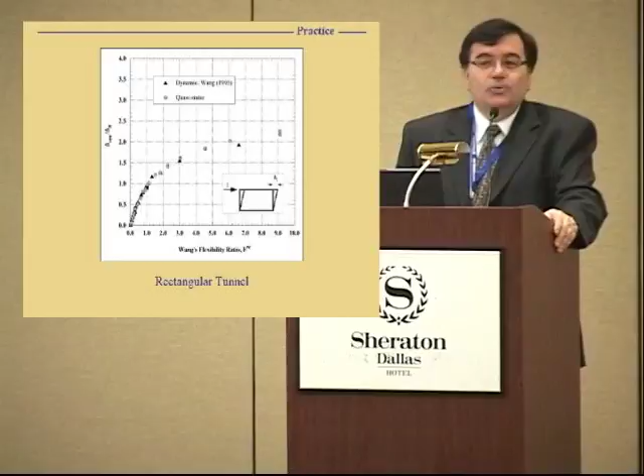All this, of course, is done with the assumption that everything is elastic. For the structure, that's okay, because we want to design structures that sustain little damage, so the behavior is mostly within the elastic regime. But what happens with the soil? The soil is going to undergo significant deformations, and that is not captured by either of the two plots I've shown you.

Analytical solutions have the advantage that once you know the deformations, you know everything, so you can have an estimate of the pressures and shear distribution of the structure. You can do structural calculations.

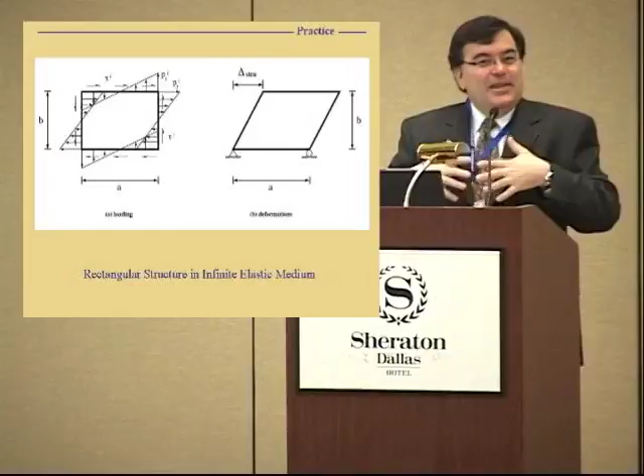But if we go back to the concept of this volume of attached soil around the structure, where the soil deforms with the structure, then we can think of an iterative scheme: we start with an assumed stiffness of the soil to do our calculations, either using a finite element method assuming elasticity, or using these charts, and we find the deformations of the structure. The soil around the structure is going to deform the same as the structure.

So once I know the deformations of the structure, I know the deformations of the soil. I can go to a chart of shear modulus degradation of the soil with respect to shear deformations, and compute what would have been the stiffness of the soil. If this stiffness matches the stiffness I used to start the calculations, that's the end of the process. If not, that means the initial assumption was incorrect, and we need to modify the stiffness of the soil.

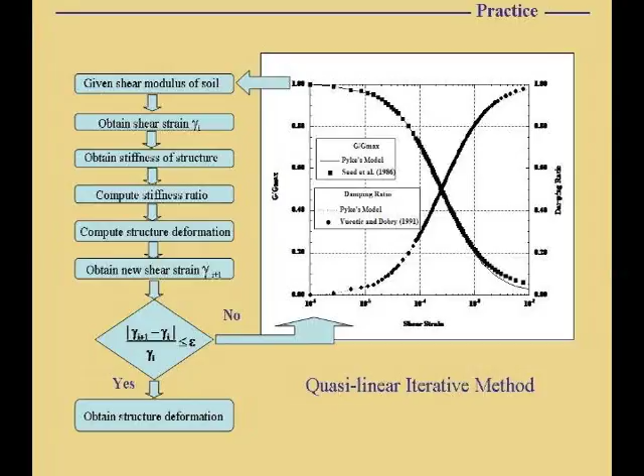So we can attempt a second iteration using as the stiffness of the second calculation, the stiffness that results at the end of the first calculation. So we go through an iterative loop where we use as input the stiffness of the soil estimated from the last iteration.

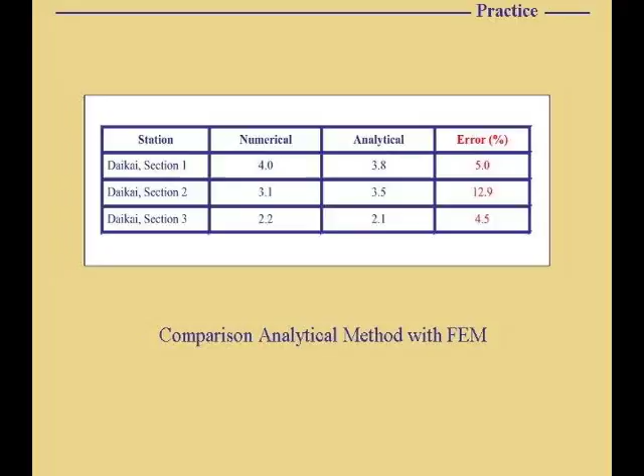So we do that, and here I show you a comparison between the distortions of the three sections of the Daikai station. You have a column with this nonlinear dynamic model, and another column with this analytical solution with the iteration process. And you see that differences are fairly small, certainly acceptable with the uncertainty that we have when we deal with seismic loading. We thought we should go outside the range of cases that we looked at to estimate or to validate or verify the approach.

So here what we did is look at the LA Civic Center station with the Northridge earthquake, where you have a schematic of the soil at the site. We input accelerations obtained from the Glendale Las Palmas station, 0.36 G horizontal, 0.13 G vertical. You have on the right-hand side the distortions of the central column.

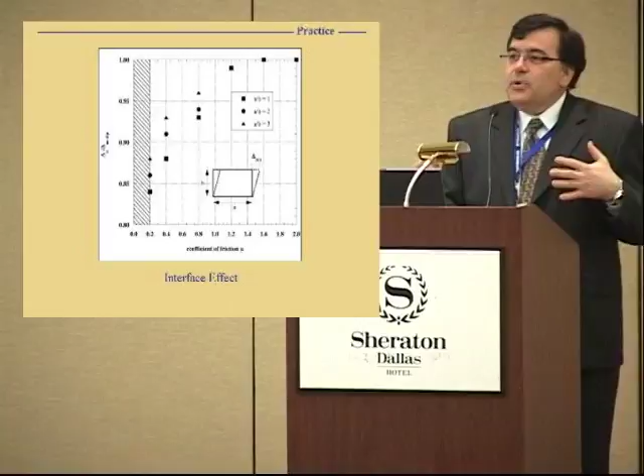What happens with interface, because we are using a tight interface, and if we look at this plot, the expectation is that we are going to be, the approach that we are proposing is going to be about 10-15% on the conservative side if we use an interface that is tight, that is frictional.

If we look at what happens at depth, the deeper the structure, the larger the deformation. So if you look at this plot on the vertical axis, it has a normalized distortion of the structure compared to the distortion of a deep structure. And on the horizontal axis, what you have is a measure of the overburden.

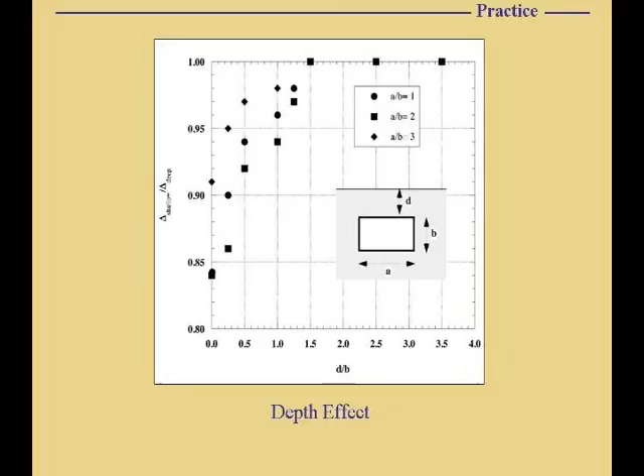So for overburden of about 1.5, which means that is the ratio of overburden over the height of the structure, can be considered deep. So deep structures are going to have about, following this plot, maybe 20% larger deformations than shallow structure.

So if we do our calculations and we assume that the interface is tight, we should be 10-15% on the conservative side. If we do our calculations with a deep structure, we should be, again, 15, maybe 20% on the conservative side.

There is a factor that is not included here, which is the effect that I showed you before, that a frictional interface produces a decrease in the stiffness of the soil, and then that produces an increase in the deformations of the structure. This effect that is not considered here is on the unsafe side by about 15 to 20%.

So we have factors that are compensating factors, and we estimate that the error that we should get following this approach is of the order of 10 to 15%, which again, I think that for the level of uncertainty should be acceptable.

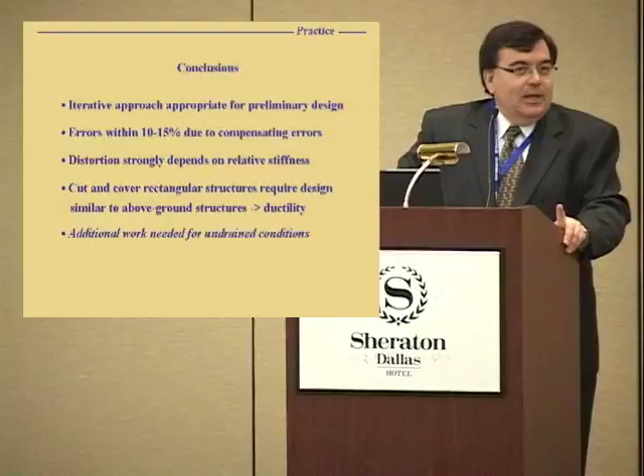So the errors, as I mentioned, are of the order of 10-15%. That would be an approach that should be okay for a preliminary design or for routine structures. But perhaps most importantly, what we need to do is provide additional ductility to our structures such that brittle failures are prevented. And probably that would be the most important thought through the design process because of all the uncertainties associated with this.

Now, there is a scenario that I think has not been explored as much as it should, which is what happens with structures that are below the water table, where excess pore pressures may be produced. I'm not talking about liquefaction, because if there is liquefaction, probably what we would do is densify the soil before building the structure. What I'm talking about is that once the structure is there, there is not going to be liquefaction, but excess pore pressures may be generated. What we do with these structures - we know very little about that, and I think that that's something we should consider.

I would like to finish this talk with two quotes from Dr. Peck, that I think are relevant to what I discussed. One says that no theory can be considered satisfactory until it has been adequately checked by actual observations. And the second one is that the most successful practitioners of the art of engineering will maintain a healthy respect for the ability of nature to produce surprises.